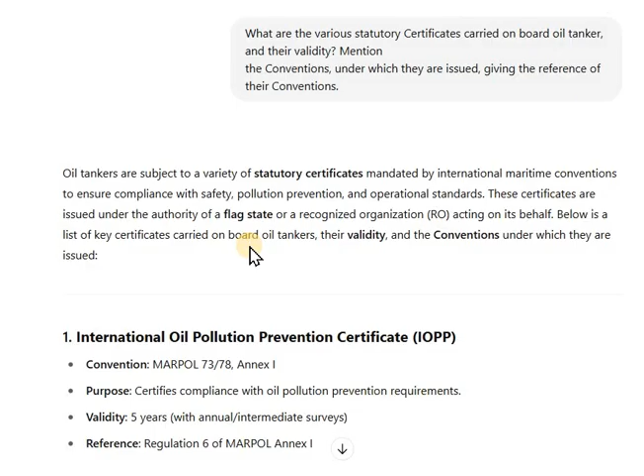Now, first of all, let's assume a scenario where there is an event of oil pollution. Let us assume there is a vessel. This is just for us to remember the sequence of certificates. For example, there is a ship and there has been an oil spill. So, what comes into the picture? The International Oil Pollution Prevention Certificate.

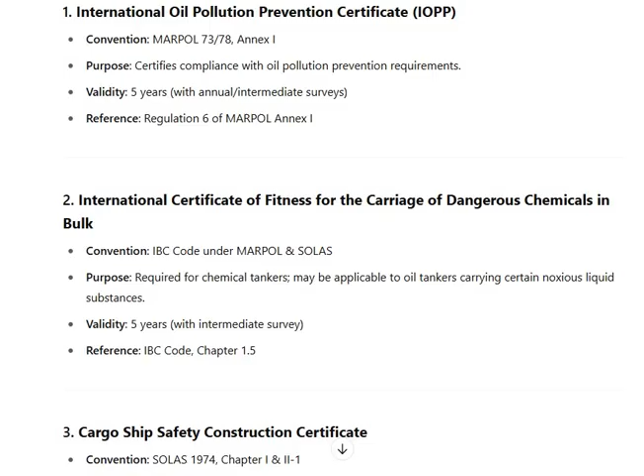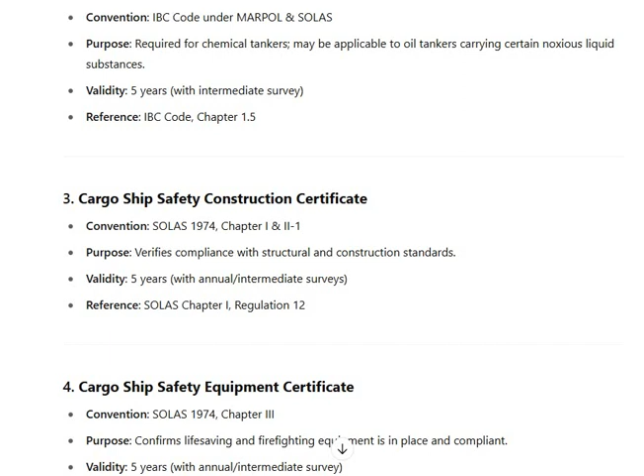Now, the chief engineer realizes that along with that, some dangerous chemical has also leaked into the sea. So then it is the International Certificate of Fitness for Carriage of Dangerous Chemicals. Now he realizes what has happened to the construction of the ship. If all the liquids that are supposed to be on board are leaking, then there's something to do with the Ship Safety Construction Certificate.

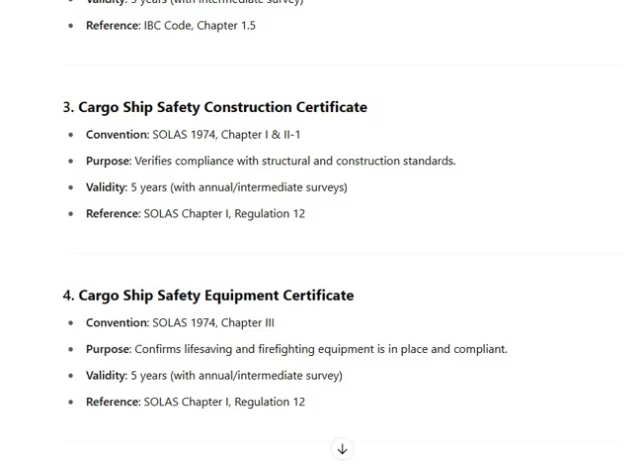Now it cannot just be the construction of the ship. It can also be some equipment that has malfunctioned, which has led to the pollution. Ship Safety Equipment Certificate. Now there is a pollution. You need to inform the Coast Guard. So you will go to your radio. So the Ship Safety Radio Certificate is in question.

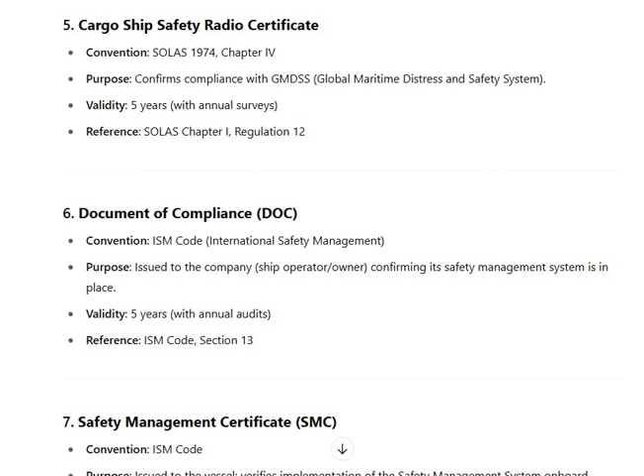Also, what happens when you inform the PSC? Immediately the DOC of the vessel is cancelled. The SMS of the DOC of the company is gone. Then followed by the SMS, the SMC of the vessel is also in question. Now, when all this happens, the ship gets arrested and brought to an anchorage. Once at anchorage, is there a possibility of pirates coming on board? Yes, there is. There's the Ship Security Certificate.

When the pirates come on board, the master and the chief engineer together will try to go away to another safe location. So they just start the engine without changing over to MGO, so 3.5% sulfur. So there is an event of air pollution, so the International Air Pollution Prevention Certificate.

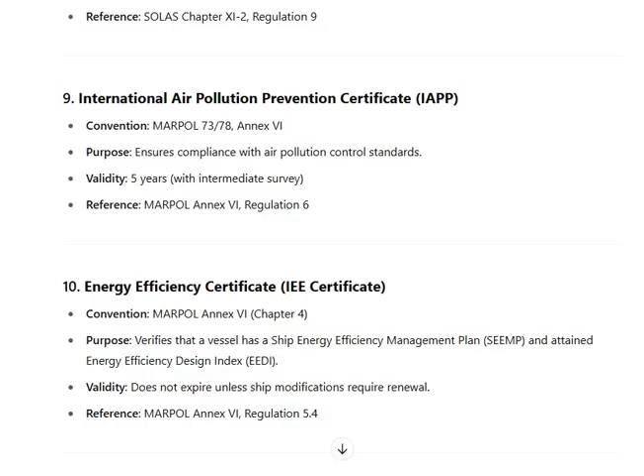Now the main engine starts. So there is an efficiency issue with the main engine, the fuel consumption. So the Energy Efficiency Certificate. Then the chief officer says, I forgot to ballast the vessel. So the International Ballast Water Management Certificate. Now all these things have happened.

So the master checks: does the vessel have a certificate of insurance or financial security in respect of civil liability for oil pollution damage? He doesn't find it. He also checks for the certificate of insurance and financial security under the Bunker Convention. He does not find it. Finally, the document of compliance of ship for oil tankers is also gone. This is just a story I have narrated so that we are able to remember all 14 certificates. Let us go one by one.

International Oil Pollution Prevention Certificate under MARPOL 73/78 Annex I. Purpose: certifies compliance with oil pollution prevention requirements. Validity, as we all know, is 5 years, but there is an annual endorsement. Also, intermediate surveys happen. This comes from Regulation 6 of Annex I.

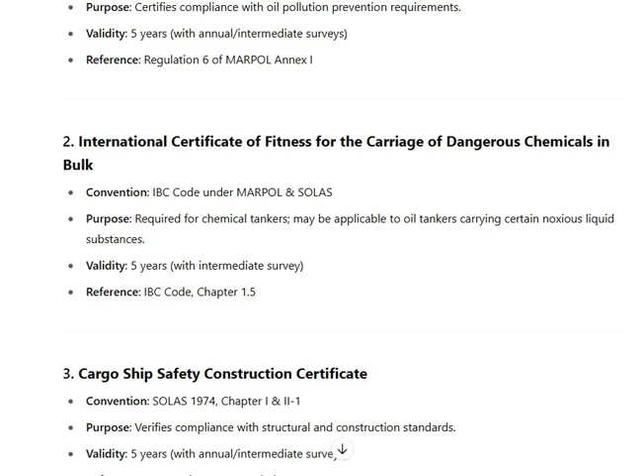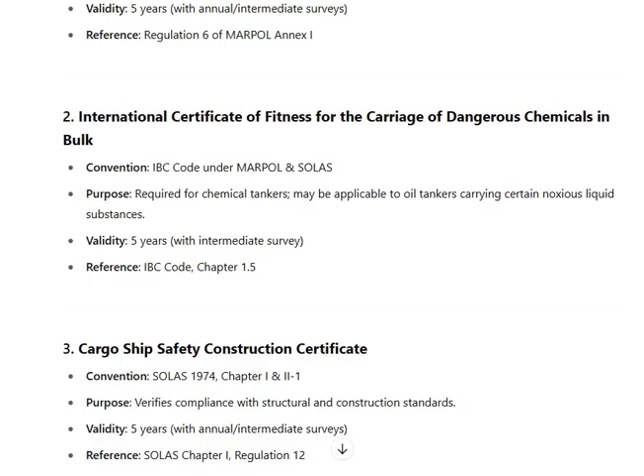International Certificate of Fitness for Carriage of Dangerous Chemicals in Bulk. This is from the IBC Code, the International Bulk Chemical Code. It also comes under MARPOL and SOLAS. Required for chemical tankers, may be applicable for oil tankers carrying certain noxious liquid substances. Validity is 5 years with intermediate survey. Reference is the IBC Code Chapter 1.5.

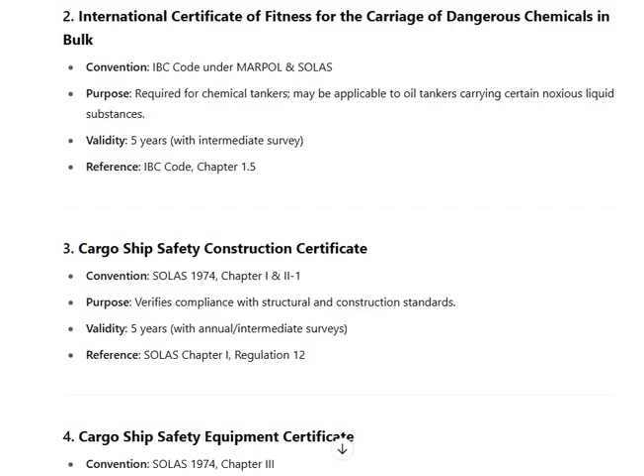Cargo Ship Safety Construction Certificate, SOLAS 74, Chapter 1, Chapter 2.1. The purpose verifies compliance with structural construction standards. Validity is 5 years with annual and intermediate surveys. Reference is SOLAS Chapter 1, Regulation 12. Ship Safety Equipment Certificate, SOLAS 74, Chapter 3.

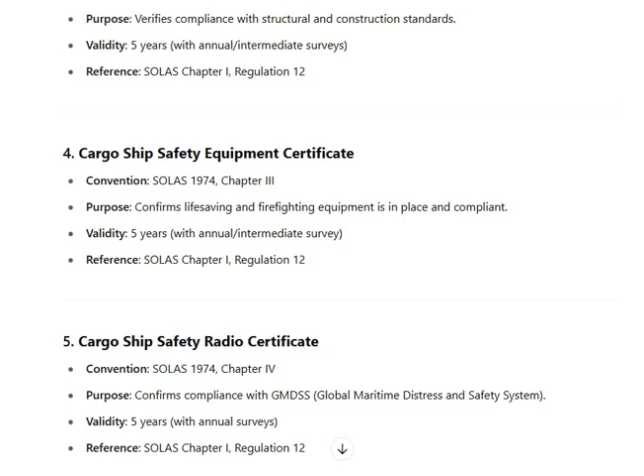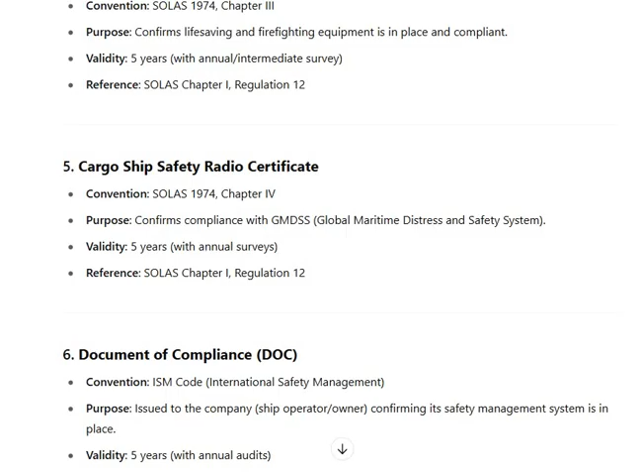Confirms life-saving and firefighting appliances are in place and compliant. Validity is 5 years and comes under SOLAS Chapter 1 Regulation 12. Cargo Ship Safety Radio Certificate: again, SOLAS 1974 Chapter 4, confirms compliance with GMDSS, the Global Maritime Distress and Safety System. Validity is 5 years with annual surveys, no intermediate. Reference SOLAS Chapter 1 Regulation 12.

Document of Compliance. Again, it's part of the ISM Code, issued to the company, confirming its safety management systems are in place. Validity is 5 years with annual audits. Of course, there's an audit of the office, the company, the manager, which keeps happening every year, and the certificate is valid for 5 years. ISM Code section 13 is the reference. Safety Management Certificate, issued to the vessel, verifies implementation of the safety management system on board. Validity is 5 years with intermediate audit.

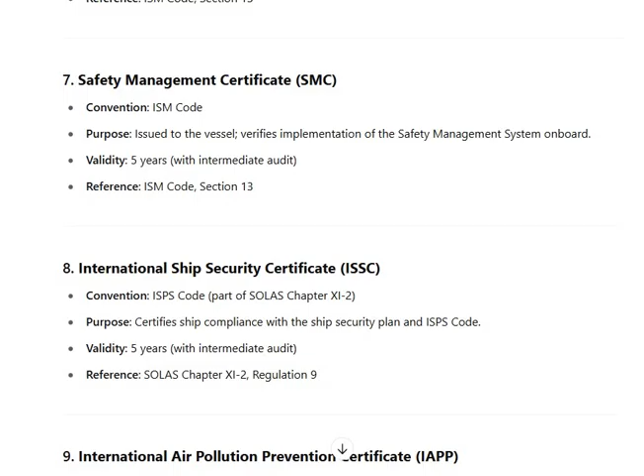ISM Code section 13. International Ship Security Certificate, ISPS, part of SOLAS Chapter 11.2, as we all know, certifies ship compliance with the Ship Security Plan and ISPS Code. So here, the Ship Security Plan and the ISPS Code is in question. Validity is 5 years. SOLAS Chapter 11.2 Regulation 9 is the reference.

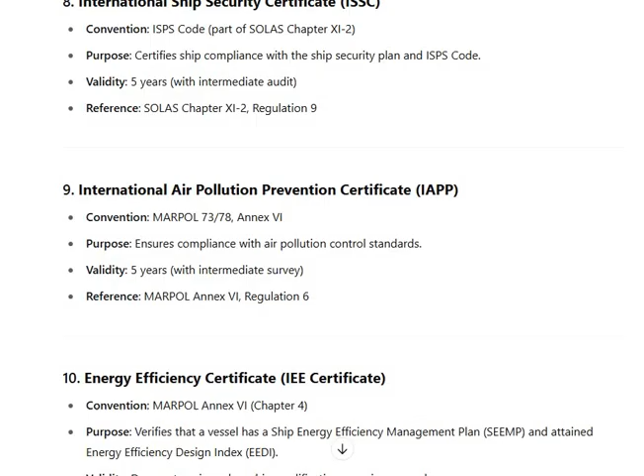International Air Pollution Prevention certificate, again MARPOL 73/78, Annex 6. Validity 5 years with intermediate surveys. There are no annual surveys here. Reference MARPOL Annex 6 Regulation 6.

Correct. International Energy Efficiency Certificate, again MARPOL Annex 6 Chapter 4. Verifies the vessel has a Ship Energy Efficiency Management Plan, the SEEMP, and attained Energy Efficiency Design Index. So SEEMP has to be there, and attained EEDI index; the value should also be there. Validity does not expire unless ship modification requires. So the International Energy Efficiency Certificate does not have any renewals as long as you have not carried out any modification. MARPOL Annex 6 Chapter 5.4.

Now, International Ballast Water Management Certificate. The Ballast Water Management Convention; verifies compliance with ballast water treatment discharge standards. Validity 5 years, subject to survey schedule. Ballast Water Management Convention Regulation E1. Certificate of insurance or other financial security in respect of civil liability for oil pollution damage. CLC 92 confirms insurance coverage for oil pollution damage liability. Validity 1 year. Article 7 of CLC 1992.

Certificate of insurance or financial security under the Bunker Convention. Bunker Convention 2001 confirms insurance for bunker fuel pollution damage. Validity 1 year. Article 7 of the Bunker Convention. Document of compliance for ship type, oil tankers. Okay, MARPOL Annex 1. Purpose: for tankers above certain tonnage and age, indicates structural compliance, double hull; varies, part of IOPP certificate classification. Reference MARPOL Annex 1 Regulation 19 and 23.

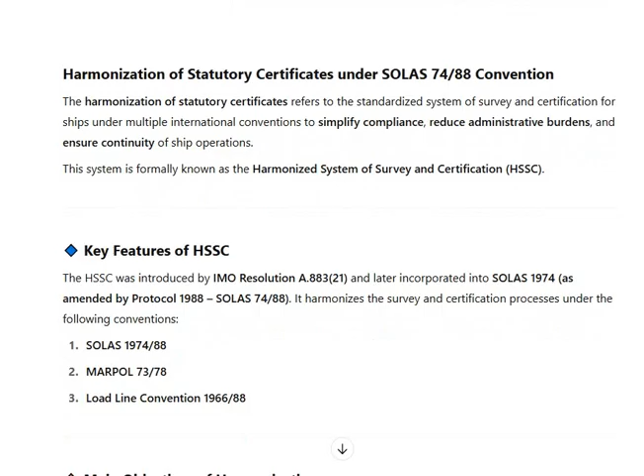Now, we need to explain harmonization of statutory certificates under SOLAS. If the period of the statutory certificate has expired and the port has inadequate survey facility, state the actions you will take in compliance with the provisions of SOLAS. Harmonization of statutory certificates under the SOLAS 74/88 Convention refers to the standardized system of survey and certification for ships under multiple international conventions to simplify compliance, reduce administrative burdens, and ensure continuity of ship operations. See, these 3 points are very important: it simplifies compliance, reduces administrative burdens, and ensures continuity of ship operation.

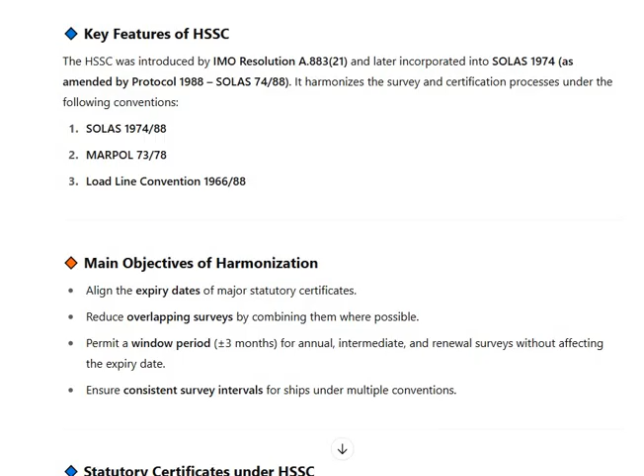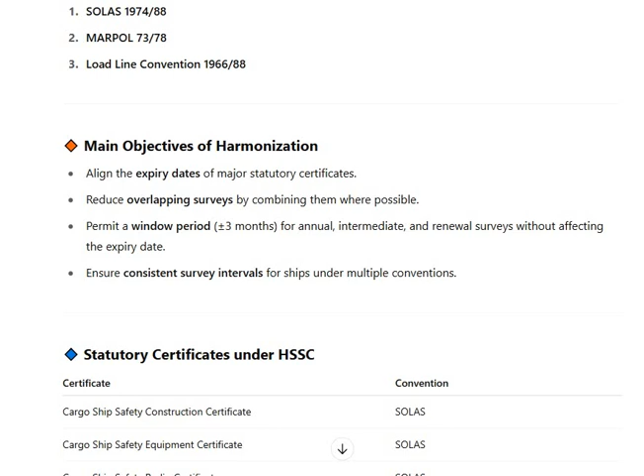This system is known as the Harmonized System of Survey and Certification. Key features of HSSC: HSSC was introduced by IMO Resolution A.883(21) and later incorporated into SOLAS 74 as amended by the 88 Protocol, SOLAS 74/88. It harmonizes the survey and certification process under the following conventions: SOLAS 74/88, MARPOL 73/78, Load Line Convention 66/88. Main objectives of harmonization: align the expiry dates of major statutory certificates, reduce overlapping surveys by combining them where possible, permit a window for annual, intermediate and renewal surveys without affecting the expiry date, and ensure consistent survey intervals for ships under multiple conventions.

Okay, again, let me repeat. The major objective of harmonization is to align the expiry dates of major certificates, reduce overlapping of surveys by combining them where possible, and permit a window period of plus or minus 3 months for annual, intermediate and renewal surveys without affecting the expiry dates. Okay, and coming down,

survey types. What do you do if the certificate has just expired? If the ship is not in a port where the required survey can be carried out, the administration may extend the certificate validity for a period of 3 months to allow the ship to reach a port where the survey can be completed. What are the actions to be taken? Report the expired certificate and lack of survey facility, provide details of the certificate in question, expiry date, condition, next intended port, request an extension for 3 months, and document the request.